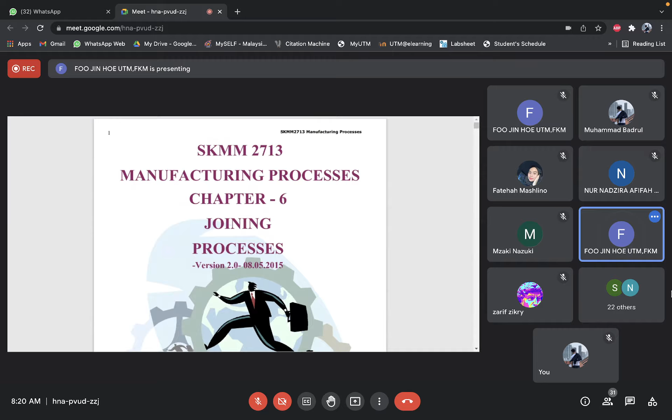So this joining process is actually one of the more recent processes. It just happened in these 20, 30, 40 years. So it's a more modern type of process in manufacturing. In general, joining is an all-inclusive term: if you join something, that is a joining process, whether permanently or non-permanently.

For example, if you bind some of your notes that you copied from my class into a file, that is a joining process because you are using another material to join papers together. For example, by using a stapler, you are using the metal staple to basically use a metal to join paper.

If you are using glue, adhesive, put on the back of the paper to stick them together, those are joining processes. Not necessarily metal joining metal, like the more sophisticated welding process. Other than that, you can have papers joined together, or how the glass is glued onto your smartphone touch screen. Those are glasses being joined onto an aluminum casing, and so on.

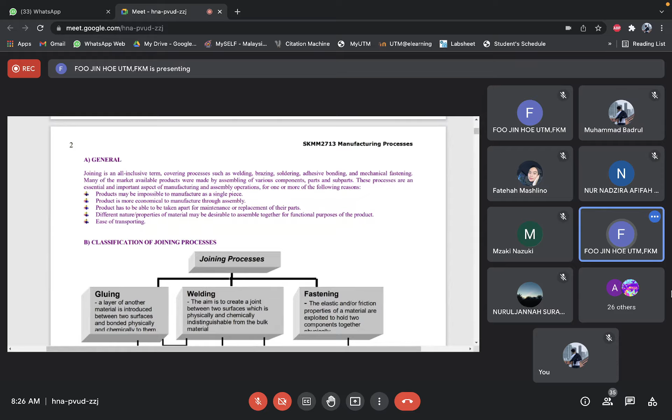Now, how would that be possible when you have materials of different nature that work differently with different functions, and so on? So how would you assemble that together, if not because of a joining process? Okay, so these processes are essential, very, very important in making manufacturing today possible. An important aspect of manufacturing and assembling operations. So there are some reasons why joining is very important.

All right, so this actually came out in the final exam before. Owing to what reasons is the joining process an important process, or being selected by industry? It's because of this. There are five of them. The first one is the product may be impossible to manufacture in one single piece. For example, an aeroplane, a car, a motorbike. How can you produce everything in one piece? One solid piece, like one block of metal. How can you do that?

Even if you can do it, it's not advisable for you to do it because of the reasons below, especially the third one. So we'll come to that. So it's rather impossible or not advisable to make it into one solid piece of product. Can you imagine you have a car in one piece? The car is one whole unit only, with no screw, no bolt, no nuts.

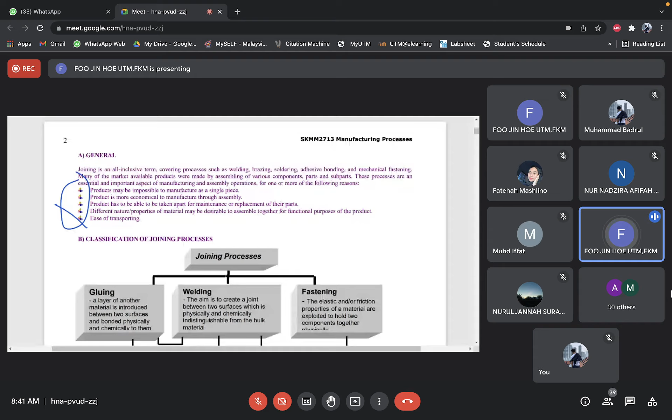So some of these parts are rather too huge. For example, this giant cruiser. How are you going to ship that? I'd rather finish the whole cruiser, and then sell it to you.

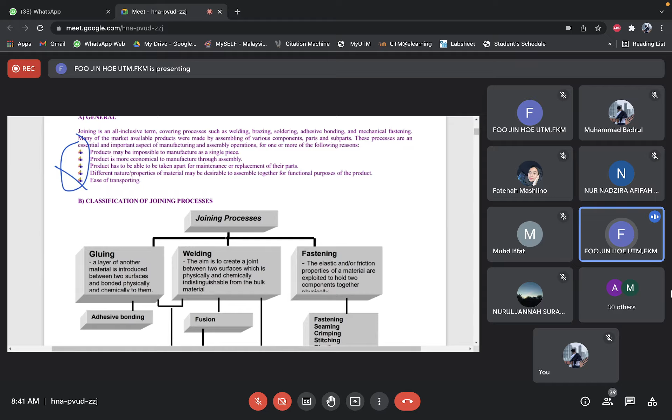All right. So let's look at one of the videos that I intended to show you, about joining. Oops, it's in Hindi. All right, we'll go to welding first.

This is the first video in a series looking at different joining methods in engineering applications, and in this video we're going to take you through a bit of an introduction and an overview of the different joining methods that we have available to us as engineers, and we're going to explain the different examples of welding that we have access to typically in industry.

Let's start by taking a look at the overall chart that we have that captures most of the manufacturing methods in the different categories. So we have forming methods over here, the main one being sand casting. We have machining methods, including turning, drilling, and milling. And in this series of videos, we're going to take a look at the joining methods, which might include things like welding, screws, rivets, splines, and keys.

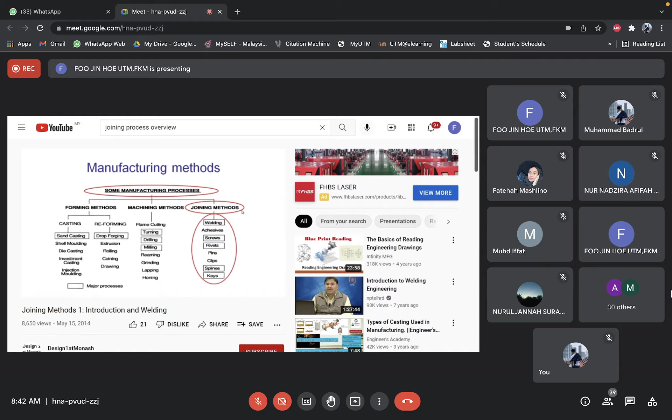These ones down here. I've got a little bit of a different way of looking at this, so I'll go to this next slide. And so this is a way of categorizing the different joining methods available to us. We can split them all up between permanent methods or relatively permanent methods. A lot of these can be undone with a bit of work, but not very easily. And then we have the temporary methods on this side of this Boolean tree.

Underneath the permanent methods, I've divided them into two separate categories, those that are joined using liquids. So this might include welding, brazing, soldering, and also the use of adhesives. And then on the other arm of this category, we have plastic joining methods. So I'm not talking about plastics. What we're talking about here is plastic deformation of our materials to enable them to act as joiners. So things like riveting, staking, forming, and swaging are all ways of joining two components or two materials together by plastically deforming those materials.

If we look over at the temporary side of the tree, we've split them up into threaded and non-threaded fasteners. So under the threaded fasteners, we have common things like bolts and screws and studs and nuts. And then in the non-threaded category, we have options such as pins and keys, splines, clips, and interference fits. So this is the way we've chosen to categorize the different methods, and we're going to work through them in this basic order now.

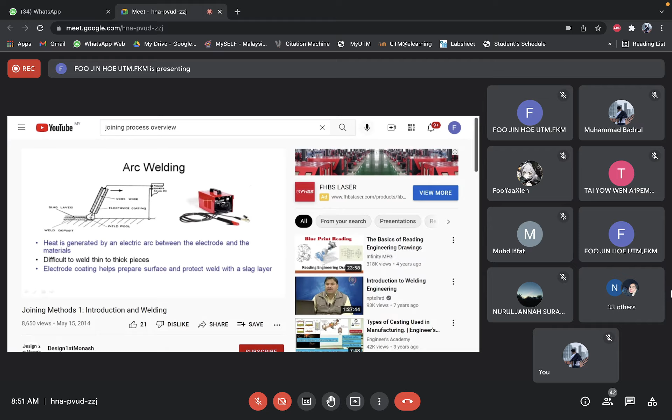Once the weld has fully cooled, if we want to expose this weld and perhaps do another pass of weld, then we actually have to chip off this slag layer once it solidifies with a hammer and make sure we've removed all of that before we do the next pass on our weld if we need to build up a lot of thickness. We can also use a similar process, but rather than having a slag layer that protects the weld, we can shield our weld pool by pumping in an inert gas and making sure that's enveloping the weld as we're welding. Typical names for these techniques are either MIG or TIG.

TIG is another option, but in TIG we don't have the reel of wire that's constantly fed out to the gun. We have a tungsten electrode, which is used to sustain the arc, and that's not consumed. And then we periodically dab in, if we need it, some filler rod as we go, and then we have the argon gas shielding this whole process as well. It's also quite common in industry to see robots performing these welding techniques in modern mass production. So that's MIG and TIG welding, which are variants of arc welding.

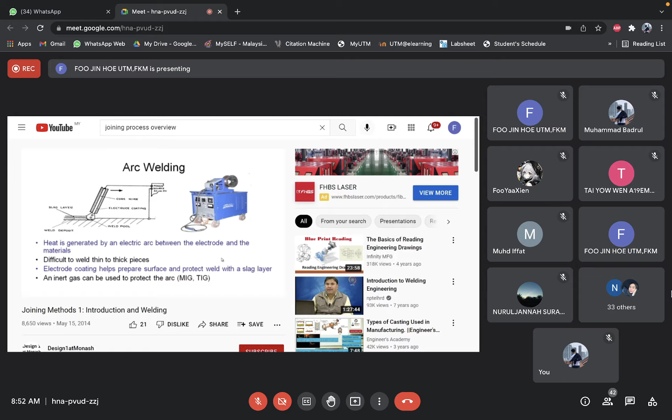The third common welding technique is called electrical resistance welding. So in this example, we take typically pieces of steel. So we have two pieces of steel in the center here, and then we have an electrode on either side, which we clamp up with a lot of force to ensure that this is all compressed together and we have a good contact going through all of these bits of material. And then we run a high electrical current through this assembly basically. And given that these electrodes are made from copper and they have a lower resistance than the steel, the large electrical resistance occurs through the steel, and that generates a lot of heat, which then melts these two steel plates together. This is commonly called spot welding.

So the heat in this circumstance is generated by our I²R electrical power relationship at this interface between the two materials. They then melt, and given the differences between steel and copper, the copper doesn't actually get stuck to the steel, and we can pull that away and it doesn't actually get welded together. We need to ensure that we've got high force here because these plates might not perfectly align, and we need to have a good electrical contact through here. So the machines that do these spot welds are quite big and robust, and they typically have a powered clamping mechanism to hold this together quite firmly.

And it's used quite commonly in the automotive manufacturing industries, where they have people and even robots which can create these spot welds at very precise positions on the car in order to join all the different body panels and floor panels together in a highly efficient production process. There are a few other variants on this theme of spot welding, and one of them shown here is seam welding. So rather than two single electrodes being pressed together, we have two rollers and they roll continuously, and then if we feed in our sheets of material here with an overlap, then that will be continuously seam welded together. And another variant of that again is slightly different, called mash welding, where we try to eliminate that overlap by squishing them very hard together with minimum overlap.

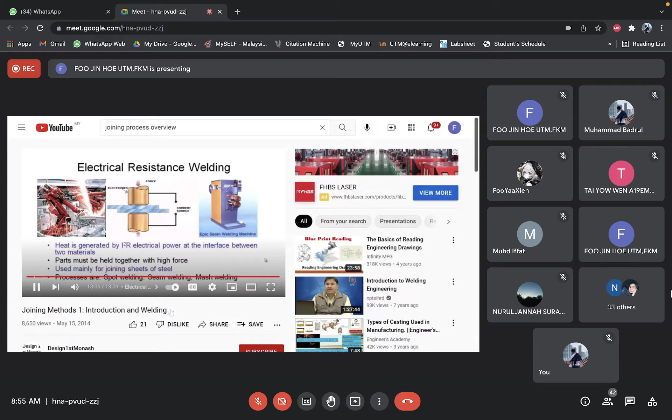Okay, so this is one of these joining methods through welding. This joining process basically is joining things in a permanent way. But of course, in a permanent way, you still can remove it. You still can, but it requires harder effort, and so on. So that's one.

So we look at another video. I found this video about the introduction of the joining process, so we'll go through it. In the video just now, it mentioned a lot of processes, right? So don't worry about that. That's only the bird's eye view. Later on, we'll go process by process, and the important ones will be highlighted.

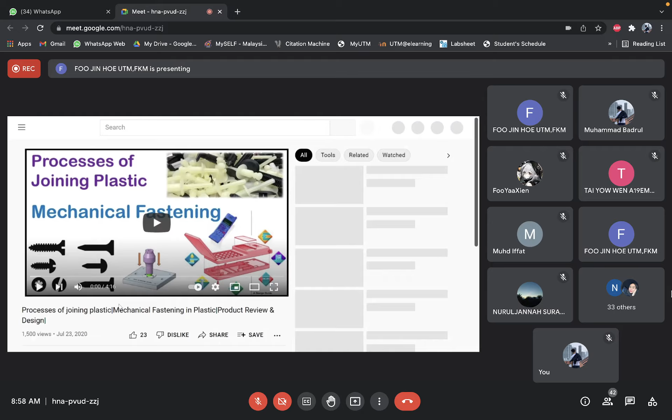Okay, this introduction just now, and even the one before the last one, is about the welding permanent joint. This next one is about mechanical fastening. Why I want to show you these three categories is because of this chart here. It mentions that in the joining process there are three major categories. One is by using glue, the adhesive method. So whatever gum, glue, and all sorts of industrial glue that you use is involved

in this category. Then welding, and under welding you can see there are a lot of subcategories: fusion, solid state, electrical resistance, and so on. We will cover each and every one of these throughout this chapter. And also mechanical fastening, which is the bolt and nut, screw, stapler, and so on. Okay, so we move back here. This is about mechanical fastening, just a very quick one. So enjoy.

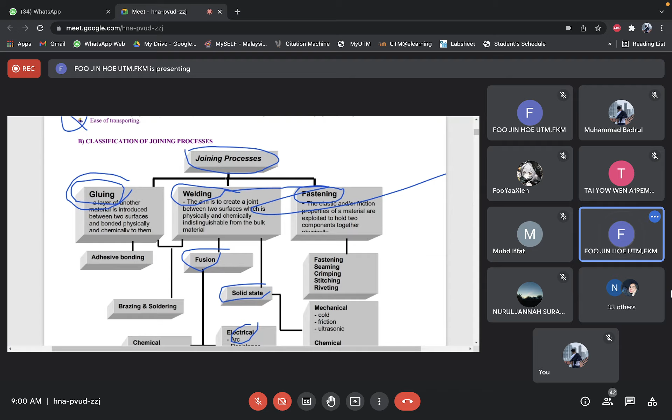Let's see the process of joining plastics. There are several techniques for joining plastics. Equipment cost and labor for each method vary considerably. Most techniques have limits on the size and types of plastic that can be joined. Types of joining plastics: first is mechanical fastening, second, fusion bonding, third is hot gas welding, fourth is vibration welding, then solvent bonding, ultrasonic welding, induction welding, dielectric welding.

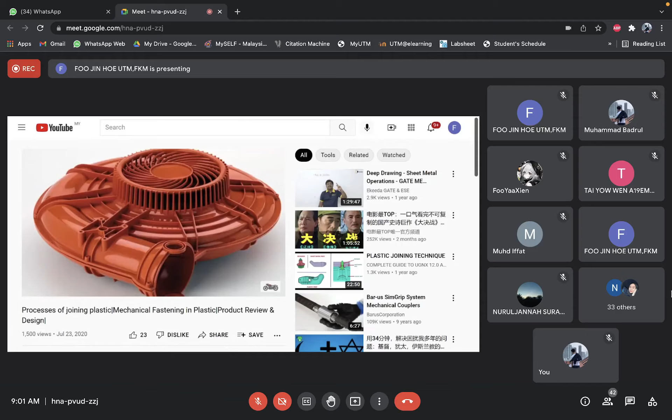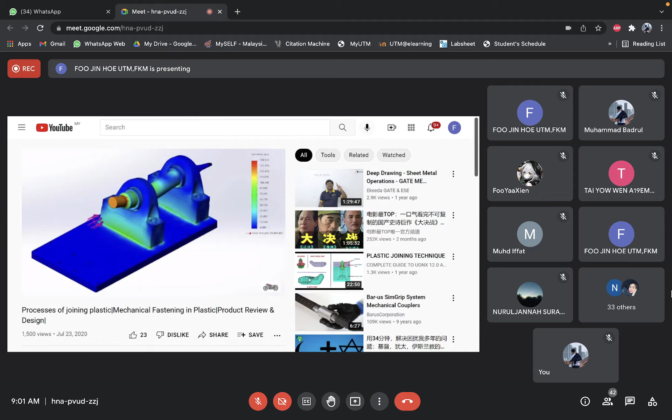Let's discuss mechanical fastening. The simplest way to join plastic parts is to design a fastening element, hinge, latch, or detent into the part. Only stronger plastics are suitable for this method. The joint must survive the strain of assembly, service load, and possible repeated use. This form of fastening is suitable only for lightly loaded, non-rigid assemblies where precision is not critical.

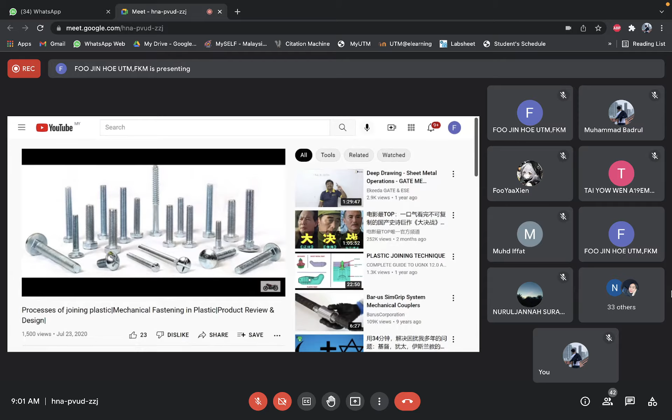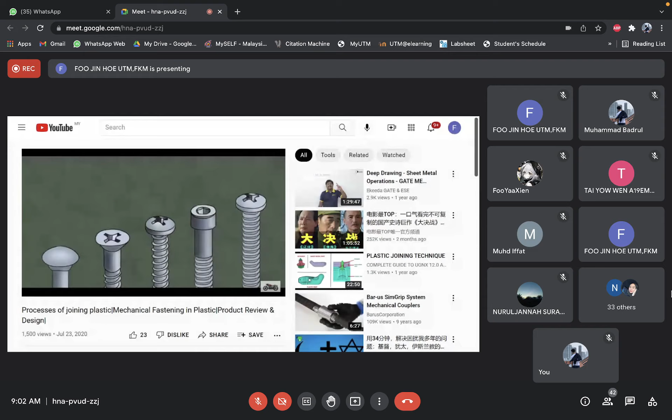Mechanical fasteners such as screws, rivets, pins, sheet metal nuts are the most common joining methods. They require a plastic that can withstand the strain of fastener insertion and subsequent high stress around the fastener. Conventional machine screws are rarely used except with extremely strong plastic. There are a number of fasteners designed for use with plastic. Threaded fasteners work best on thick sections.

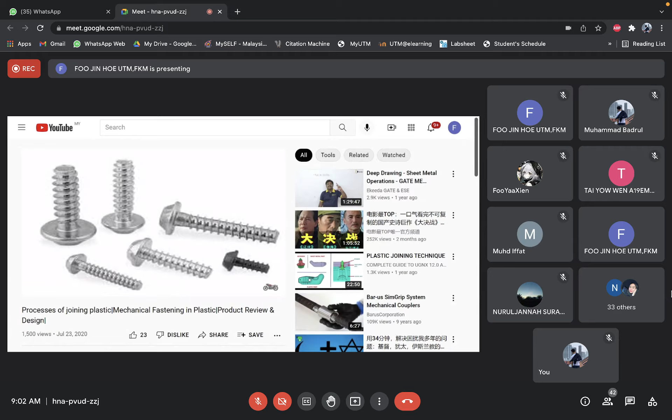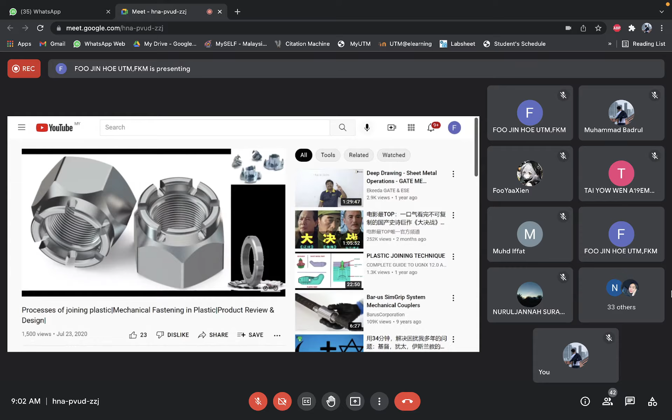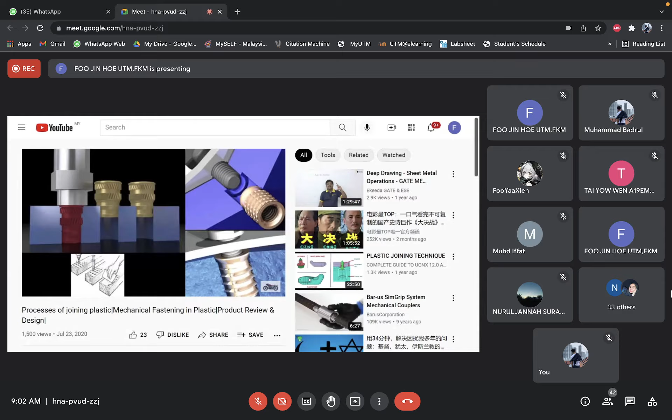Thread forming screws are preferred for soft material, while thread cutting screws work best on hard plastic. Push-on lock nuts and clips may be better for thinner sections. If a fastener has to be removed a number of times, metal inserts are recommended. They may be molded in place, forced, glued, or expanded into the hole, or inserted ultrasonically.

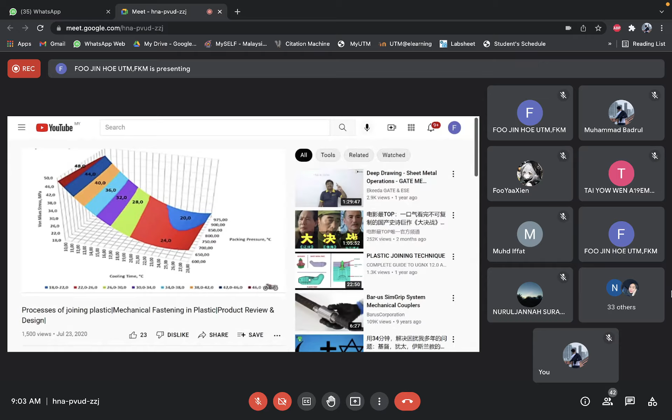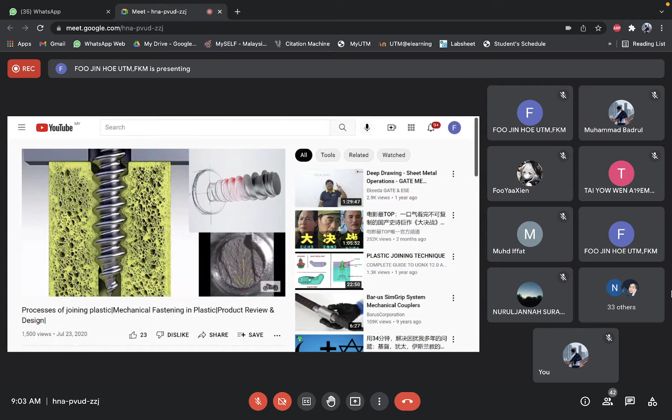There are two main categories of industrial fastener, permanent and non-permanent. Screws are an example of non-permanent fastener since they can be removed, replaced and reused. Failure is normally a result of cracking or crazing due to tensile stress that can be induced under the high pressure. Compressive stress is much more desirable due to the lower susceptibility to localized stressing, cracking.

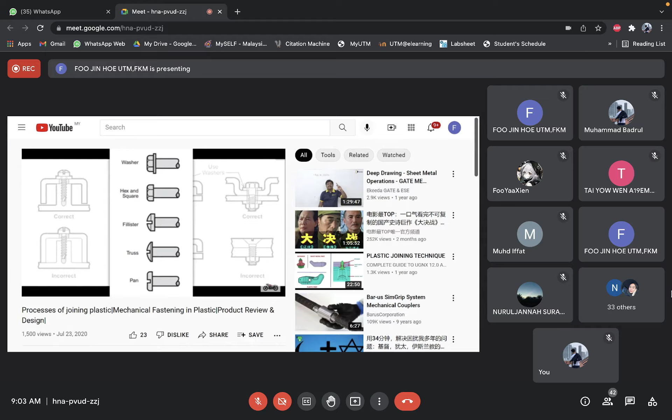Use screws in mechanical fastening as per head design: washer type, hex and square, fillister, truss and pan head. As per the first image, to fasten the part with a screw you need to provide a boss between two surfaces and also use a standoff according to the application. In the shown picture, don't use the circular hole to fasten two parts. If we provide an oblong shape at one side and the other side oblong shape, the fitment will be correct.

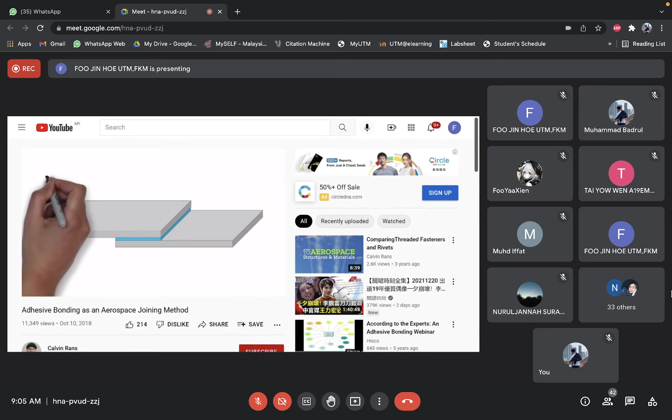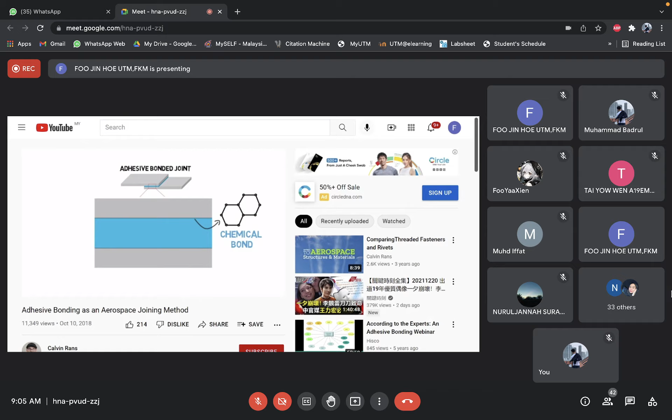An adhesive bonded joint relies on an adhesive material to join the two parts together. If we look closely at how this adhesive material connects to the parts it is joining, we can see that two different mechanisms for transferring load come into play. First, the adhesive material forms a chemical bond with the part it is joining. These chemical bonds and their strength will be dependent on the bonding process and the compatibility of the adhesive and joining material. Second, the adhesive material will flow into the nooks and crannies of the microscopically rough surface to be joined. The adhesive will then mechanically interlock with this surface roughness, allowing some load transfer through mechanical interlocking.

Realizing this, let's take a closer look at the possible failure modes of an adhesively bonded joint. If we zoom back out from the joint and think about how such a joint can fail, it is possible to envision three major categories of failure. If the load exceeds the strength of the material being joined, you have failure in the joint material, known as adherend failure. Like with mechanically fastened joints, this is a desired failure mode as it means the joint is sufficiently designed to reach the strength potential of the structures it is joining.

If the load exceeds the strength of the adhesive, then the adhesive material can fail. This failure mode is typically referred to as cohesive failure, as the chemical bonds that hold the molecules together within the material are known as cohesive bonds, and it is these bonds that are overcome to cause the failure of the material. This failure mode is limited by the strength of the adhesive material.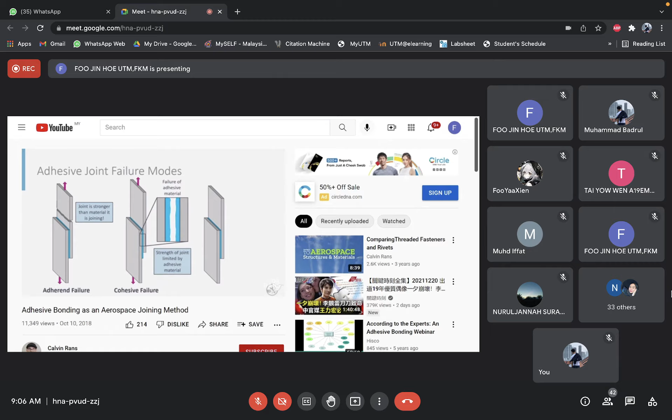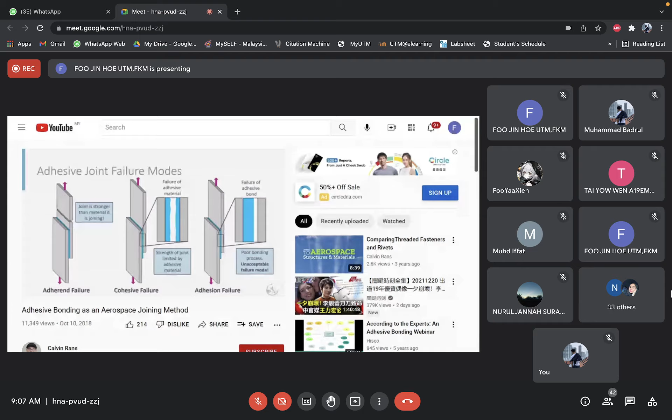Conversely, if the chemical bonds that glue the adhesive material to the part being joined are overcome by the loading, failure can occur along the interface between the adhesive material and these parts. This failure mode is known as adhesive or adhesion failure and is limited by the quality of the chemical bonds formed during the bonding process. This failure mode is not acceptable for aircraft structures, and if it occurs, it is a sign that there were problems with the bonding process itself.

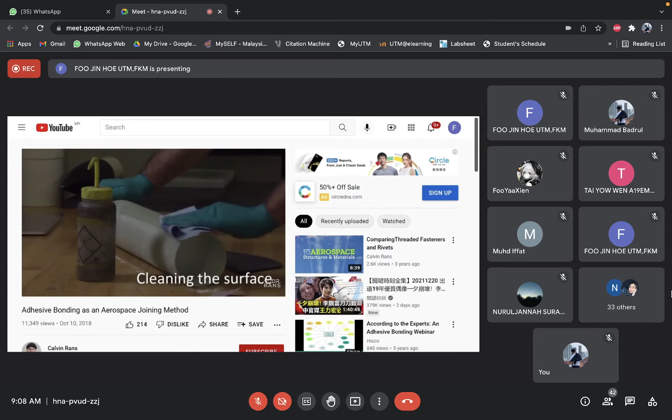It is important to understand the basic steps within the bonding process in order to understand the potential risks for adhesion failure in a bonded joint. If we start with the two parts to be joined, the first critical step is to prepare the surfaces of the parts. This surface preparation step can involve one or more of the following: increasing the roughness of the surface using an abrasive material such as sandblasting, cleaning the surface using industrial solvents to remove any grease or impurities, and using a chemical process to activate the surface of the part, making it more prone to form chemical bonds with the adhesive material. The next step is to apply the adhesive material to the parts to be joined.

The adhesive material can come in many forms, including an adhesive film or paste that can be applied on the surface of the part. Once the adhesive is applied, the parts can be assembled and temporarily held in place with some form of clamps or fixtures. This is an important step, as the adhesive cannot carry loads until it has fully cured, forming all the necessary chemical bonds with the surfaces of the parts.

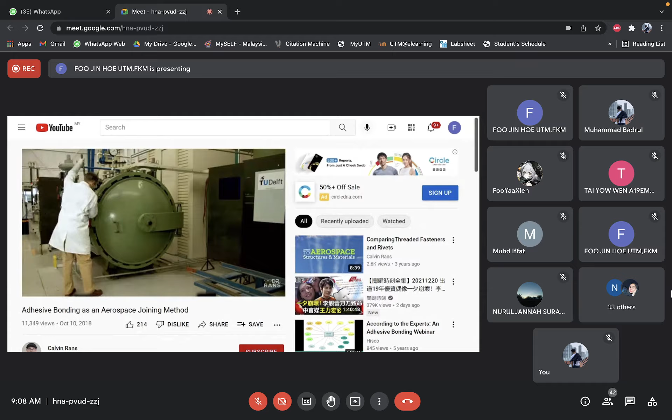The final step is the curing step. In order to speed up this process, it is common to apply heat and pressure to the part, which will accelerate the chemical reaction within the adhesive. In aircraft manufacturing facilities, you will often see large pressure ovens known as autoclaves, which are used for curing adhesively joined parts and composite materials, which are essentially adhesively bonded structures.

From the description of the different steps within the bonding process, it should be clear that the surface preparation step is vital for ensuring the quality of the bond. Impurities and insufficient activation of the surface to be bonded can result in a very low adhesion strength of the joint, which is unacceptable for aircraft structures.

Unfortunately, one of the challenges we face in the aerospace industry is that the pretreatment processes we use tend to involve toxic chemicals that are not good for the health of workers or the environment. We are constantly trying to find more environmentally friendly options. However, these tend to have a significant reduction in performance.

The second major challenge is the repeatability of quality in the bonding process. You might have inadvertently encountered this before if you have ever used adhesively backed sticky notes. If you put a number of sticky notes on a wall, being sure to try and repeat this process in the same way for each note, you will notice over time one or more of these notes may fall down.

It is easy to say that contamination or small variations in the process resulted in the premature failure, but predicting which note will fall first and when it will fall is extremely difficult. This inability to precisely predict when failure may occur makes certification of bonded structures very difficult for safety-critical structures.

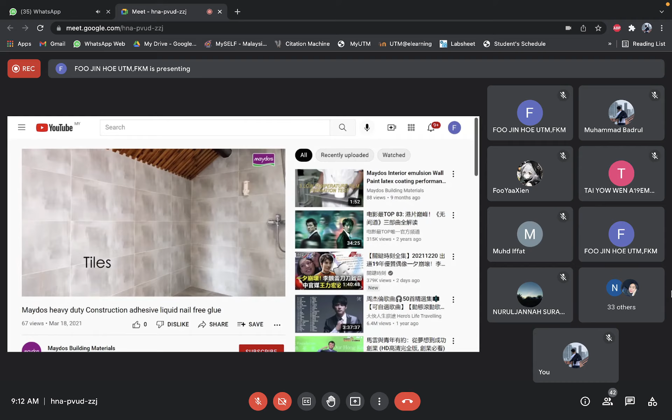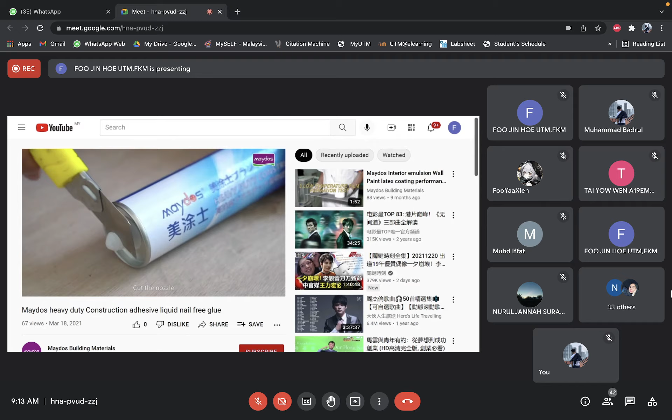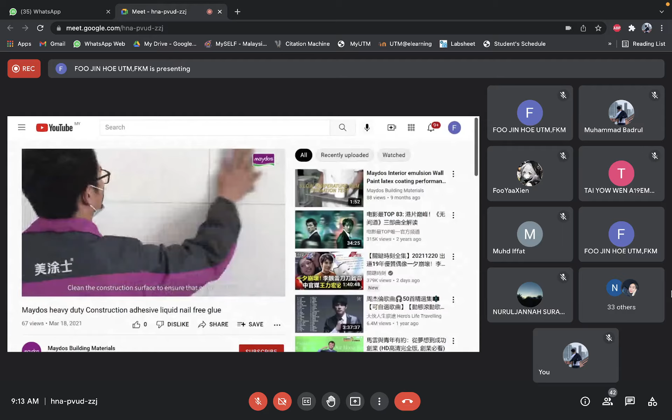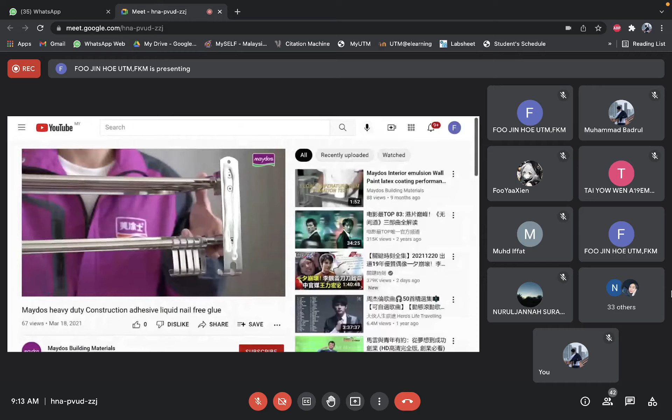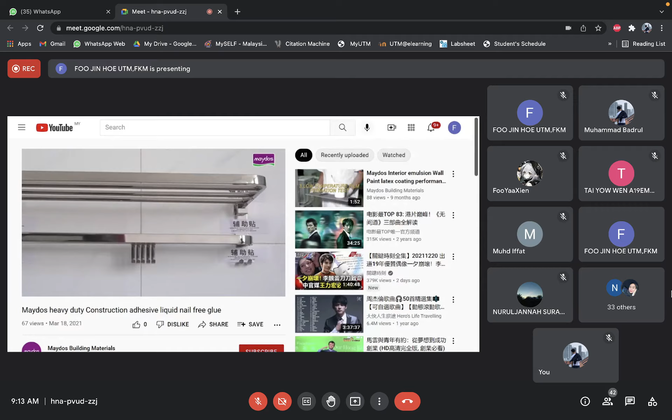Application introduction. Cut the nozzle, poke the tin foil, install the glue into the gun. Clean the construction surface to ensure no oil and dirt. Settle on the right position. Spread the nail-free glue evenly on the back of the fixed rod. Stick it on the wall. Press hard for 2 minutes. Observe whether it slides down. Stick an auxiliary sticker on a fixed position and use it after 48 hours of drying. Maydos nail-free glue super adhesion.

Of course, when we are talking about the strength of this thing, it's not basically designed for heavy duty usage. For example, a moving mechanism that repetitively has to go through a cycle of, let's say, stampings. For those stamping machines, maybe glue might not be that appropriate.

But for example, this kitchen towel hanger is used to hang towels, your cooking pans, and so on. That might be just a few kilos of weight, a few hundred grams. It might just do the trick, okay? It serves the purpose of having more than sufficient strength to actually withstand this weight, and it justifies the usage for its functioning purpose.

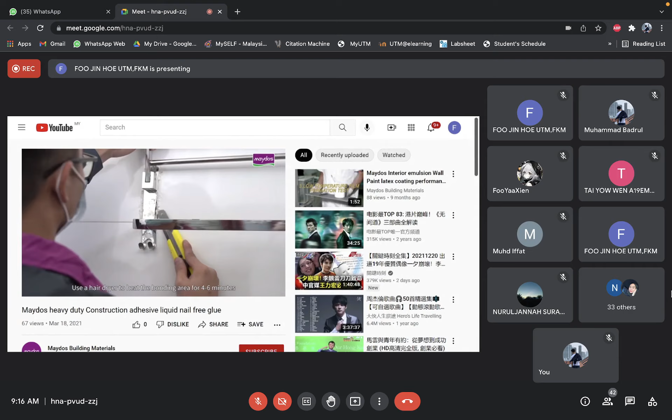Disassembly method. Use a hairdryer to heat the bonding area for 4 to 6 minutes. Move up and down slowly, then take down the shelf. Scrape the wall and clean with a rag.

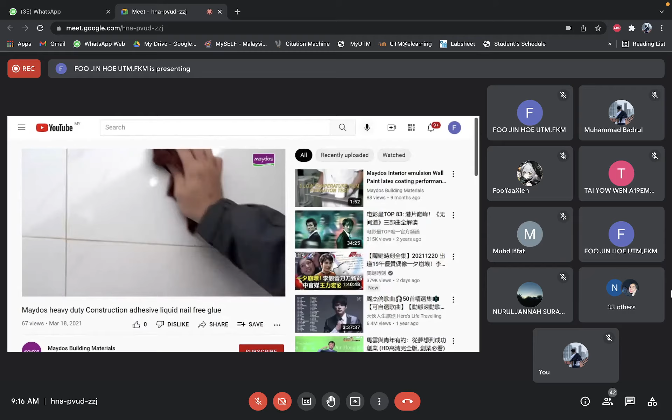So here's another one. I got this at home. I saw this in a Facebook advertisement whereby they use this kind of adhesive tape to seal off, for example, a leaking pipe, or broken containers, and so on, by using adhesive.

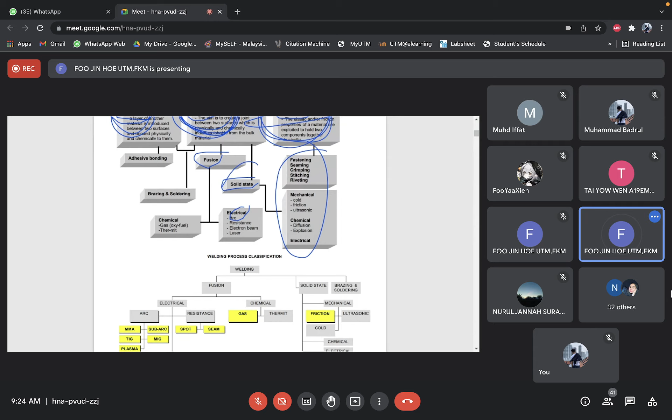So in other words, without this joining process, amazing products will be limited. A lot of things: oh, we cannot join, we cannot do, we have to make everything in one piece, and so on. That would be very much impossible if you want to do everything in one piece, like I mentioned just now. All right. So there are various processes, various categories of process, and within each of the categories there are subcategories.

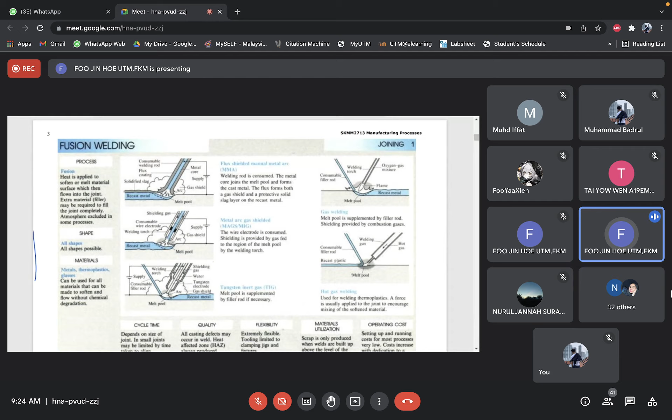So the first one we will go into is fusion welding. Fusion welding basically is by the use of heat. Heat is applied to soften and melt the material surface, and then it flows into the joint. Extra material, sometimes we use filler. The philosophy is just like the soldering process. When you are soldering, you put the soldering element or the filler, and then do the joining. So sometimes it's with filler, sometimes it's without filler, depending on the necessity. All shapes are possible.

Because this fusion welding is permanent, it's not only applicable to metal, right? So it can be used for all material that can be made to soften, in other words, that can be melted, and then flow without chemical degradation, meaning that after it melts, it solidifies without losing its characteristics, either physical, chemical, or mechanical properties. It will stay the same.

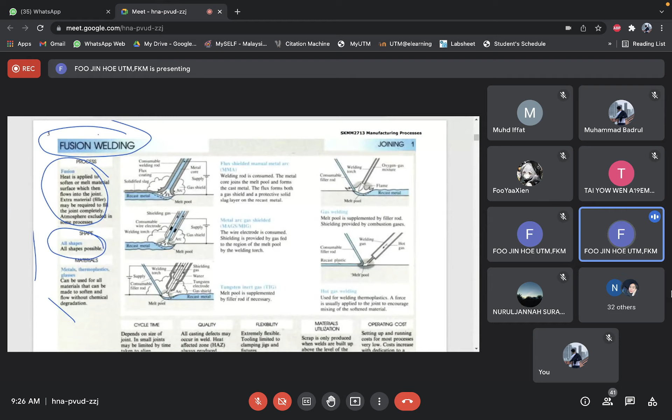But you have to be aware that if you are melting particular parts of this material, there will be some amount of oxidation if you don't take care of it properly. As you know, oxygen is the cancer of any metal. It will weaken the products, it will weaken the materials. Not to say it's the end of the world, we can do something to prevent or reduce it. But you must be aware that this actually takes place. Okay, so this is an overview of what fusion welding is.

All right, so what is the fusion process? So we look into fusion welding.

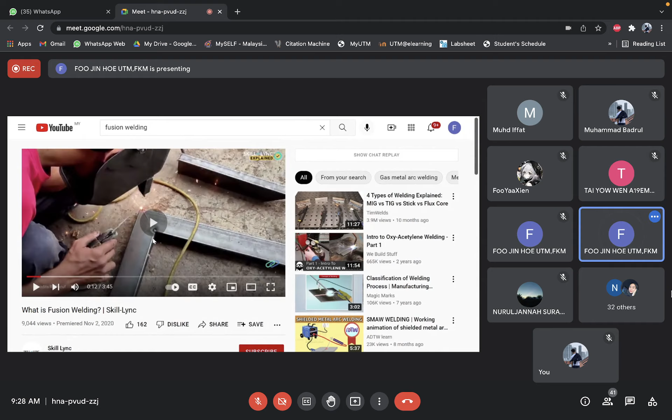It requires electricity as the power source to generate the heat. Metal bar or rod. A very bright blue light emits from the metal. The blue light is nothing but heat from welding, and this is our topic for today. Around 50 different types of welding operations have been catalogued and recognized by the American Welding Society. We can divide welding processes into two major groups: fusion welding and solid-state welding. In this video, we'll be talking about the fusion welding process in detail.

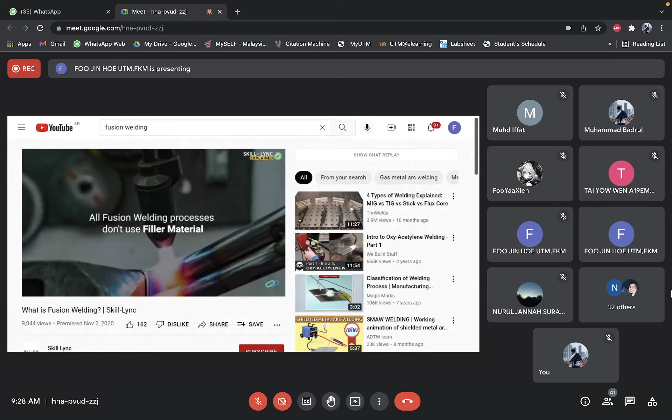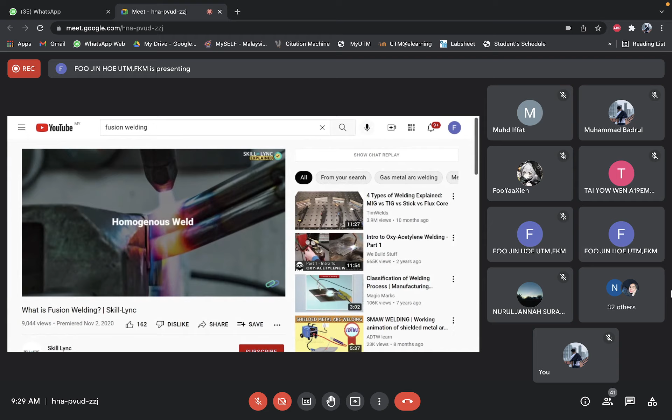The fusion welding processes use heat to melt the base metals. In many fusion welding operations, a filler metal or material is added to the molten pool of metal. This is done to increase the strength of the weld joint. However, not all fusion welding processes use a filler material. Such processes are called autogenous welds. If the filler is the same metal as the parent material, it is called a homogeneous weld. If the filler material and the parent metal are different, it is called a heterogeneous weld.

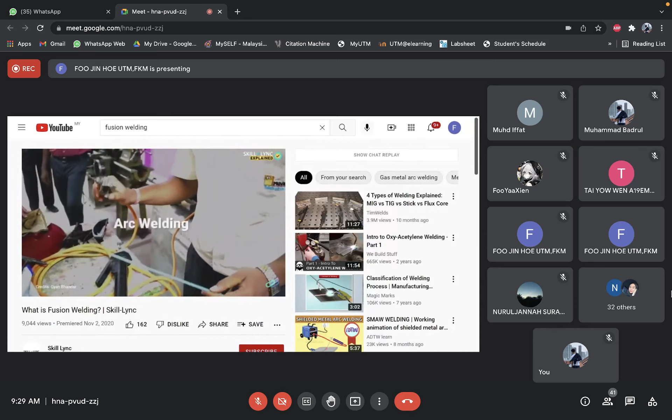In this video, we will have a brief discussion on the different types of fusion welding processes, and then we will discuss the in-depth working of each welding type. The first type of fusion welding process is arc welding. Arc welding refers to a group of welding processes in which the heating of metals is achieved by an electrical arc.

Some arc welding. Okay, you can see this stick here. So this is a consumable stick. So in this arc welding, or this fusion welding method, this stick here will become shorter and shorter and shorter because it melts. Okay, so I'll discuss that in the note section later on. All right. So this thing is consumable.

Okay, this thing is actually holding a torch, holding this stick, and it is being connected to this power source. So the power source will generate enough power so that the electricity will flow through these tips. And then when you are approaching, let's say, this workpiece, it will create a spark. Means that the electron will jump from these tips to the parent material.

All right. So the philosophy works something like the spark plugs in our car, whereby the charge is being forced to jump from one tip to another surface and then creates the heat required. So in the end, the higher the power or the higher the voltage being set for this process, the more of the charge is going to jump from one tip to another. So it will create even more heat.

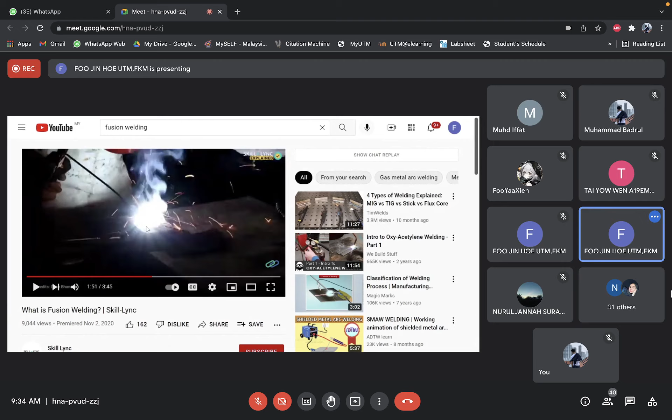Utilize a filler metal. The second type of fusion welding is gas welding. In gas welding, a strong, high-temperature flame is generated with the help of flammable gases. The flame is used to generate heat and raise the temperature of the metal piece at the place where the joint... So this is another welding method that we'll discuss at a later stage in this fusion welding.

This is by using chemical combustion. It's a mix of chemicals, by the use of, let's say, oxyacetylene gas, so it's hydrocarbon based, with a mixture of oxygen and so on, to create this kind of flame that is used. There are advantages in this, which we'll discuss later.

But I can tell you first hand that with this method, basically we can perform this welding anywhere you can think of. For example, in arc welding, what is required is of course the toolings, the welding torch, and so on. But the one thing that must exist is the electricity.

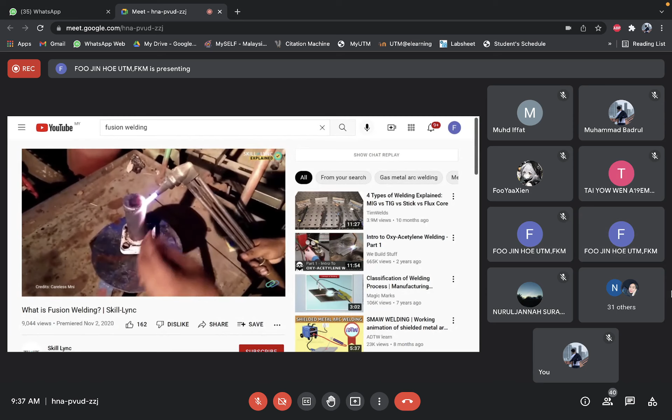Joint is to be made. Due to the heat from the gas flame, the metal at the joint starts to melt. The molten metal is then joined to another metal workpiece. A filler material is also added to the molten metal to act as a binder. The molten joint is then allowed to cool and solidify. Many different combinations of gases are used to obtain a heating flame, the most common being the oxygen acetylene flame.

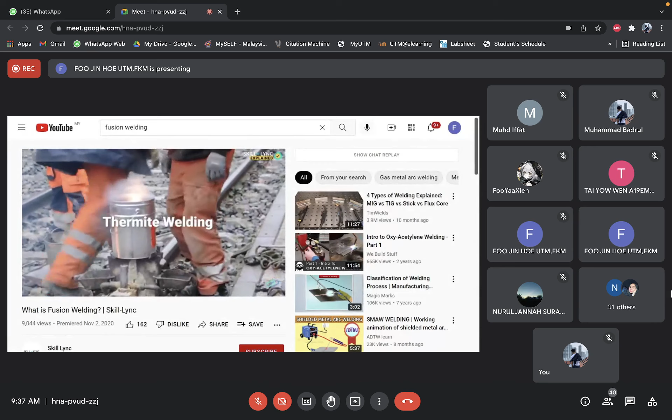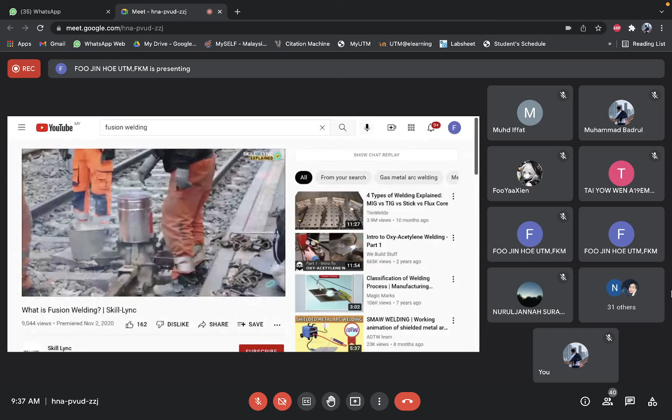The third type of welding is thermite welding. In this type of welding, a thermite compound is used to weld two metals together. Thermite is a type of chemical composition of a metal powder. The powder normally consists of a metal and a metal oxide. When ignited, it undergoes an extremely exothermic redox reaction. Here, the oxide from one metal transfers to the other metal. In this process, a huge amount of heat is generated for a brief period.

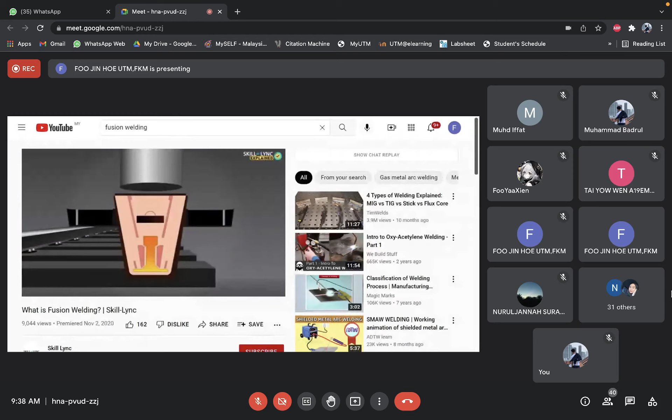Thermite welding is mostly used to join rail tracks in railways. This was done as it required almost no heavy machinery and is very fast. This welding process is also used to repair rail tracks as the molten metal from the reaction can be used to repair the tracks. Well, that's it for today's video, guys. In our next video, we'll have a very brief discussion on each of the individual processes we have talked about.

Okay, so this is more or less about fusion welding. So we move on to this thing called arc welding. Okay, we move on to the animation first before we see the real thing.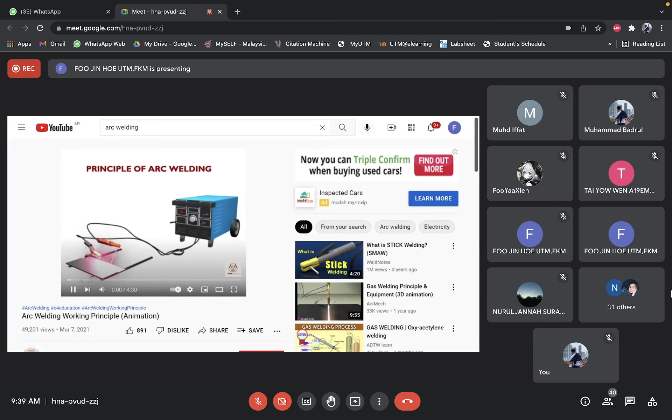Principle of arc welding. Now we are going to see the principle of arc welding. Arc welding consists of an arc welding machine. So this is the power source, all right? This power source of course goes to the wall plug, and normally it's three-phase. Three-phase is about 415 volt, I think. All right.

So here are some controllers, and then the plus minus, and so on. The control button, the on-off switch, and so on. Work lead, electrode lead. So of the plus minus, one would go to this torch, and one would be ground, to complete the circuit, so that the spark will actually jump from the tip of this rod to the parent material. If this is not connected, there won't be any jump of sparks from the tip to the parent metal. All right.

Electrode holder, flux coated electrode, clamp, and metal plate. Right, it mentioned just now there is a flux coated electrode. Now, why do we need a flux coated electrode? Let's move back to our notes. So let's say we have this parent metal, this torch, and this filler rod here, so it will create sparks when the electrons jump from the tip to the parent metal. As a result of that, this will melt and start sitting on top of here.

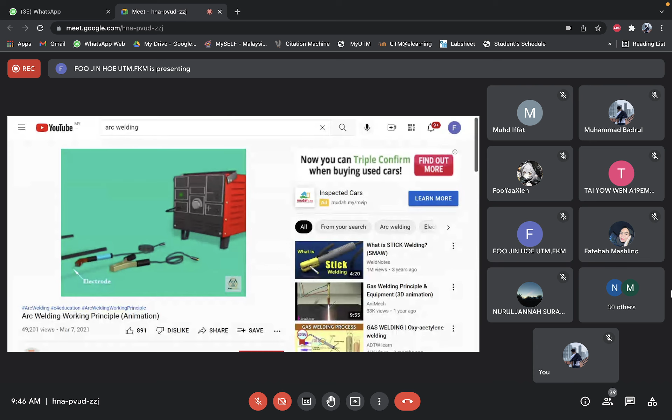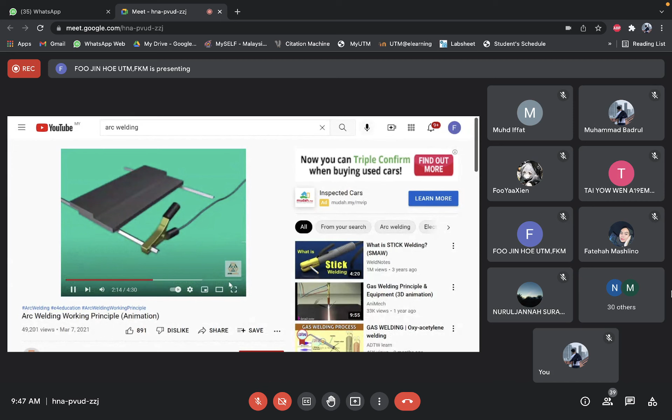Metal arc welding consists of an arc welding machine, electrode holder, clamp, electrode lead, work lead, negative terminal, positive terminal, and electrode. The work is connected to the positive terminal of a DC welding machine. The electrode lead is connected to the negative terminal of a DC welding machine. The electrode holder carries the electrode.

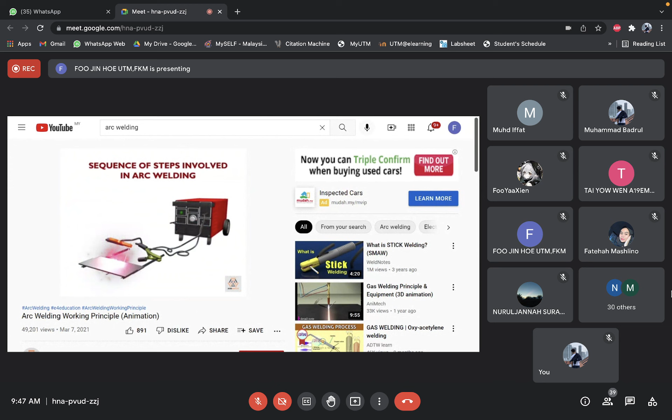That is the general setup of arc welding. The sequence of steps involved in arc welding is explained in the next video. Sequence of steps involved in arc welding. Here, we are going to see the sequence of steps involved in arc welding. Arc welding consists of an arc welding machine, electrode holder, and clamp.

The leads are to be connected properly to the power source. The electrode is connected to the negative terminal of a DC welding machine. The work is connected to the positive terminal of a DC welding machine.

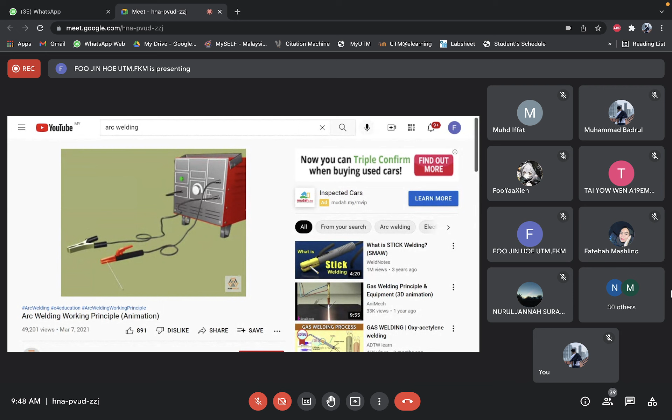The edges are to be cleaned with wire brush. Okay, I mentioned here that it has to be clean, right? So, in order to have this arc welding done in the most perfect way, you have to weld on a very clean surface.

Okay? A surface that is clean from rusting, clean from oxide, clean from oil and grease, so as to make this electron jump from the stick to the parent material happen in the most perfect way, or else it will be hindered. Some of them spark successfully, some of them don't because of the blockage, because of the obstacle from this oxide layer, rusting, grease, dirt, and of course paint on top of the surface, and so on. So it will actually hinder this whole arc or fusion welding process.

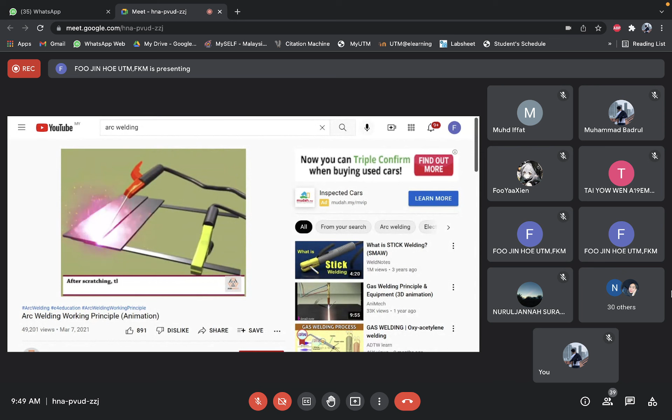Striking the arc, the tip of the electrode scratches on the parent metal. After scratching the tip of the electrode for a moment, a gap of approximately 3 mm is to be maintained. The electrode should move along the length of the joint, maintaining the arc and avoiding distortion during welding.

At the end of the run, the slag coating present on the bead is chipped off. You can see that they're using this kind of hammer to remove the slag that is covered on top, like I discussed with you, the blanket used to protect the welded area from oxygen. It is being chipped away, all right? And then the area is cleaned with a wire brush. Two dissimilar metals are joined by using arc welding.

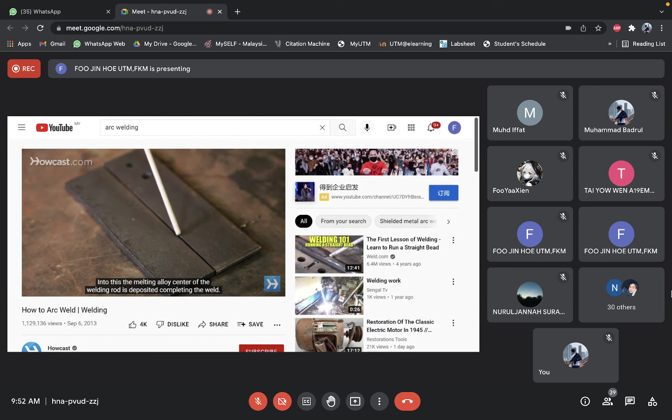One thing to be careful of: as you're welding, this rod is being consumed. That is, it's growing shorter. So the operator has to constantly be aware of both moving the rod laterally and pushing the rod into the seam being welded. The first step in learning how to arc weld is learning how to strike the arc. Striking the arc can sometimes be very difficult at first. It's a delicate flicking motion. It's not a stabbing or a quick drag, but as if you're striking a match gently.

Once the arc has started, the trick is to maintain a nice smooth molten puddle of metal with a consistent distance between the tip of the welding rod and the surface of the work. All right, let's give it a try. Welding hoods down. Remember, never look at an arc with the naked eye. Now that you've mastered striking the arc, and it may have taken you several tries, don't be discouraged. Let's join some metal together.

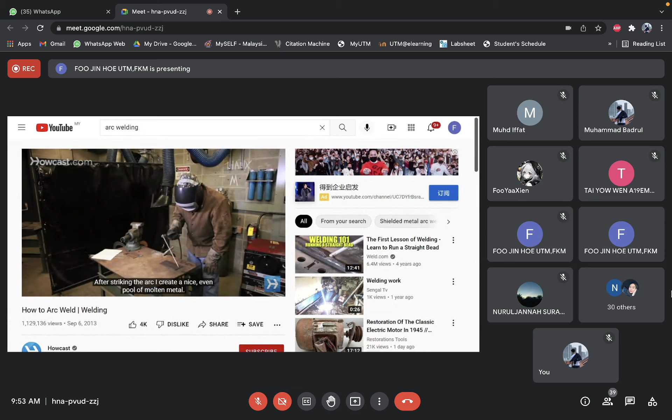Okay, hoods down. After striking the arc, I create a nice, even pool of molten metal. You'll notice that the tip of the welding rod stays very near to the arc puddle, and that I'm also slightly wavering the tip of the electrode back and forth. The idea is to heat both pieces of metal evenly as the filler rod is being deposited.

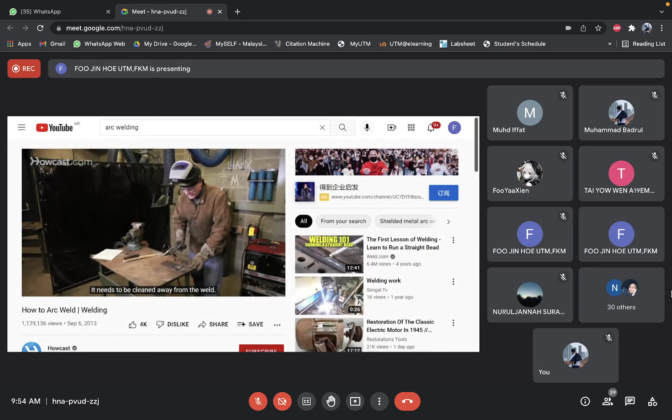Once you've completed your arc welded seam, you'll notice that there's a blue-black residue on top of the weld. This residue is the byproduct of the burning flux. It needs to be cleaned away from the weld. You can do this with a chipping hammer and wire brush.

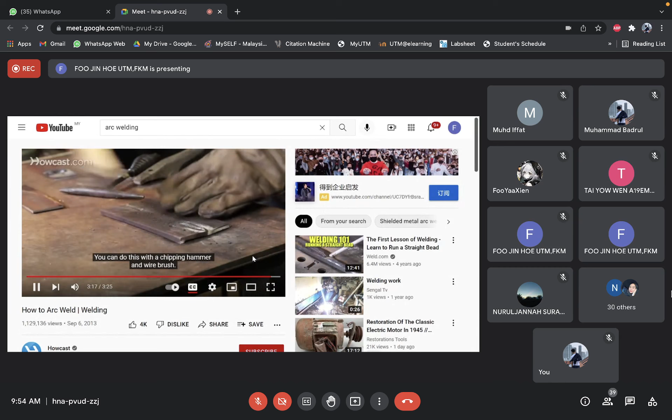All right, I think that will be all for today. We will continue more on arc welding in our next class, which will be on Monday next week.